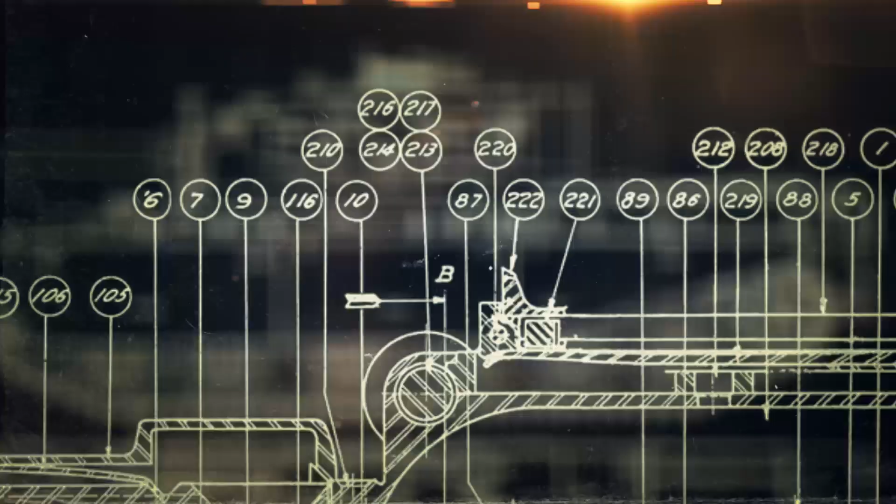This time on Battle Factory: the survival kit you carry in your pocket, the red dot that's right on target, battle dress that's bulletproof, and the submachine gun that strikes like a scorpion.

Battle Factory steps beyond the front lines into top secret factories where combat gear is built for battle.

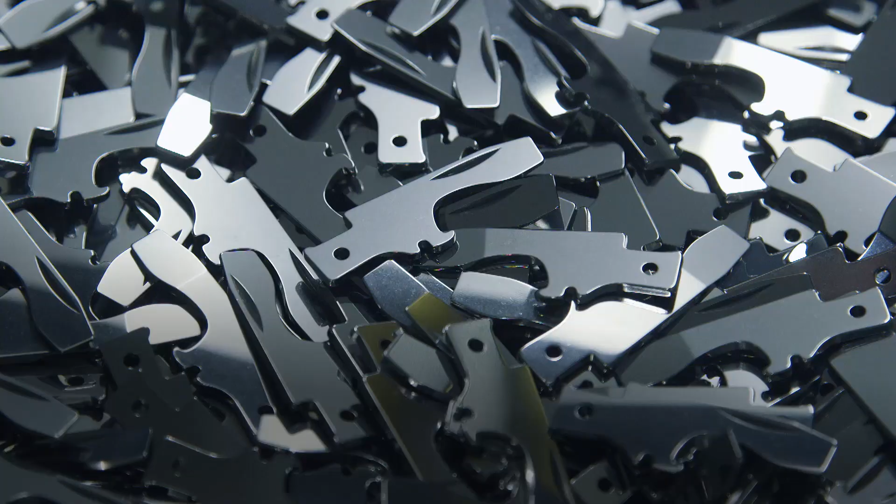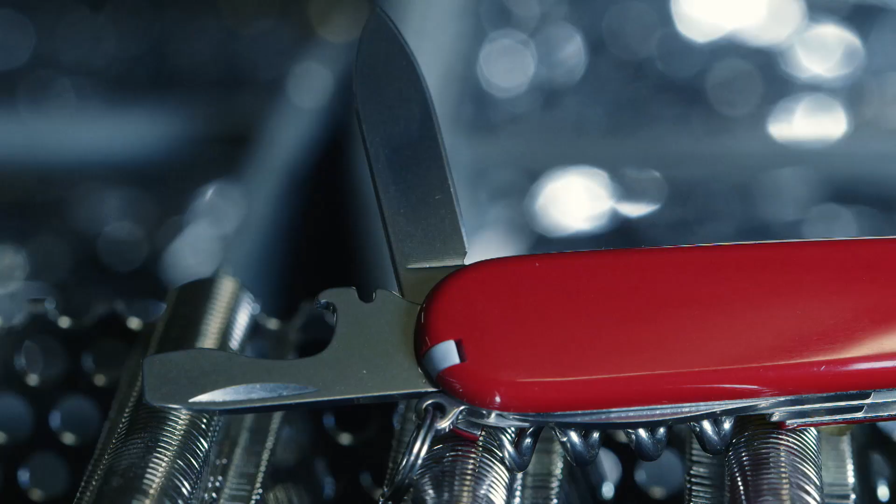When these tiny tools are machined and joined together, they will make up the ultimate mini multitasker. Since its invention over a century ago, the iconic Swiss Army knife has evolved into a pocket-sized hardware store with fold-out features that include everything from tweezers to a wood saw.

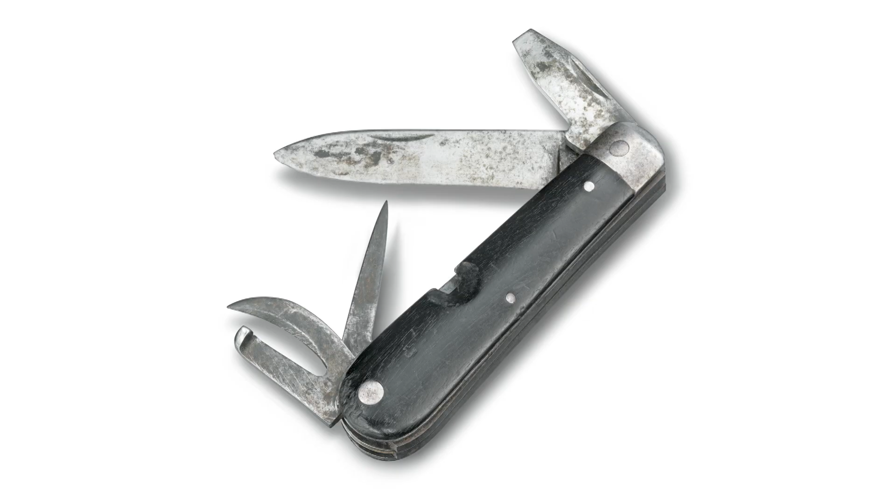In 1891, in his cutlery shop in Ibach, Switzerland, inventor Karl Elsener came up with a multi-tool which incorporated a knife, can opener, and screwdriver in one compact body, the soldier's knife, and it soon became standard issue to the Swiss Army. Today, the Swiss Army knife is used by millions of soldiers and civilians alike for everything from chopping firewood to building a spear.

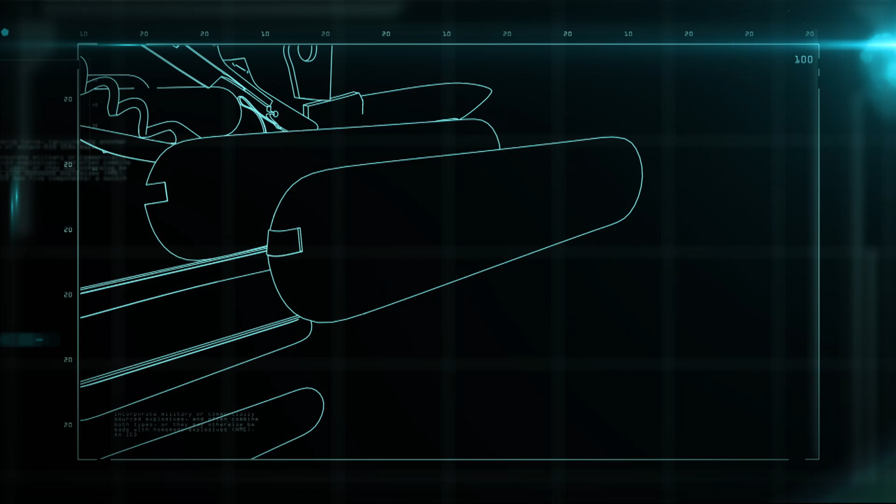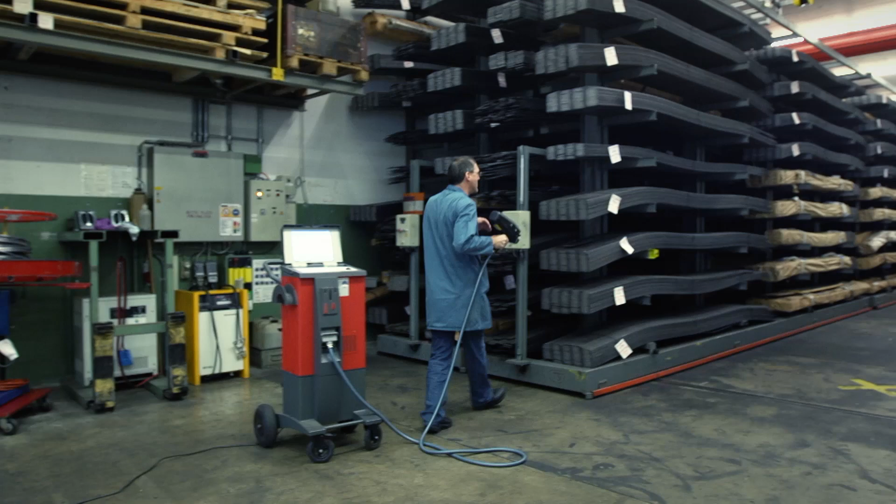The Swiss Army knife breaks down into three parts: the case, the dividers, and the tools. All the steel tools are made with 13% chrome to make them rust resistant.

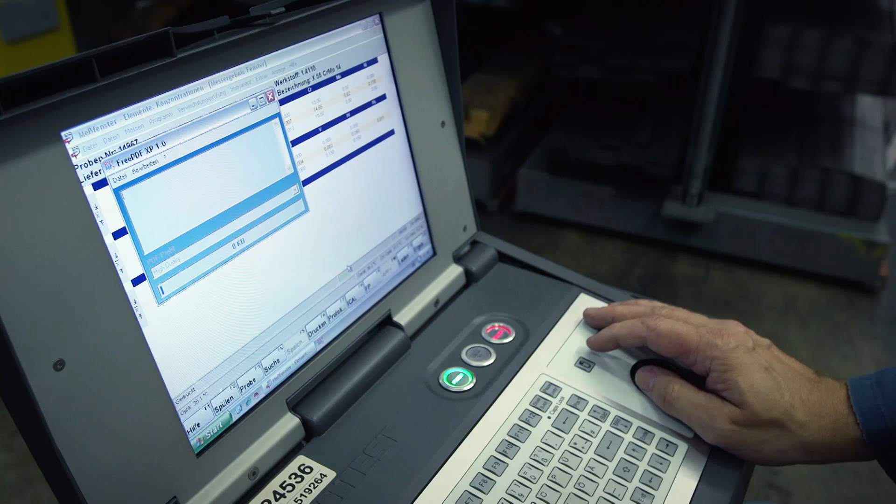Before construction begins, the steel sheets are checked for consistency. A spectral analyzer measures the purity of the metal. Spools of 3mm thick steel are transferred to the punch press room.

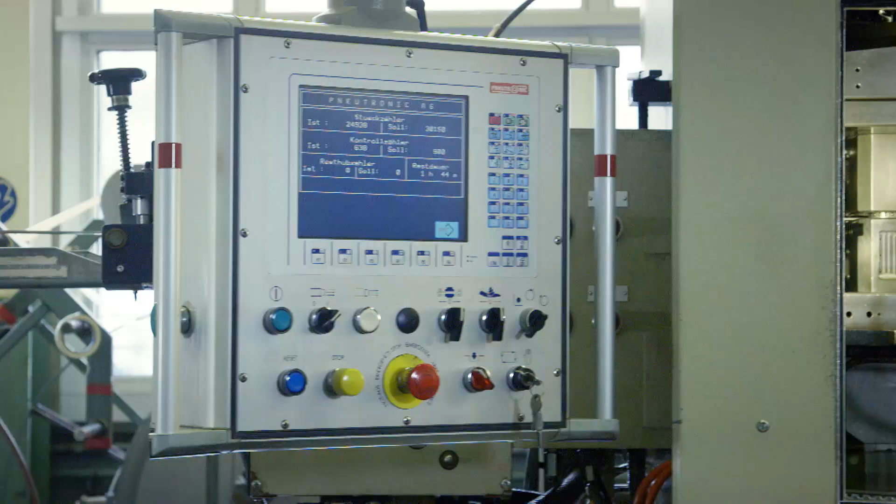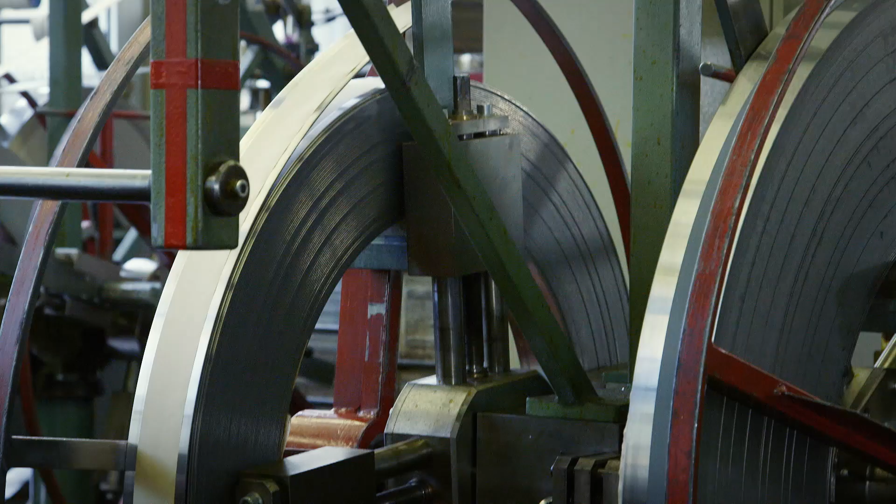20 computer-controlled presses punch through the steel with 40 tons of force to cut out the Swiss Army knife's legendary blade. Each strip of steel will produce 30,000 knives.

Next, the bottle openers, can openers, and the rest of the Swiss Army knife's many gadgets are punched out. The classic model contains 7 tools, including the penknife and scissors. But some knives, like the Swiss Champ XXLT, have 70 gadgets, including pliers, a magnifying glass, and a ballpoint pen.

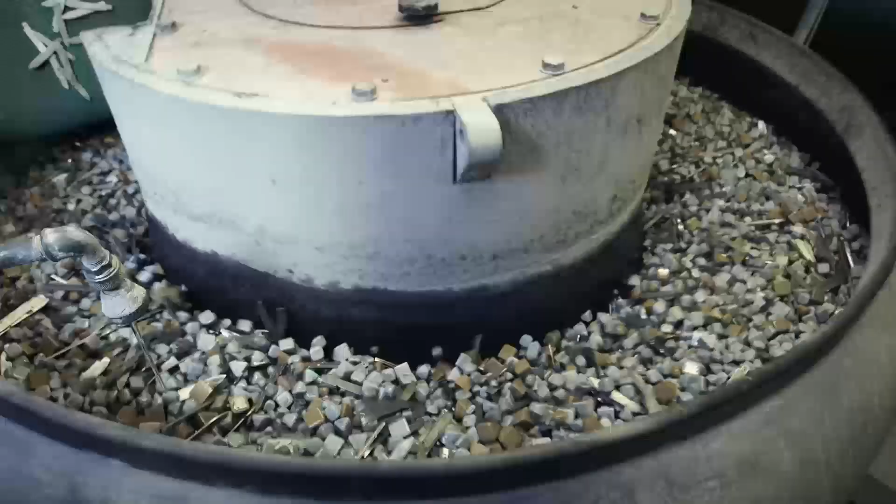The blades are placed in huge vibrating machines filled with stones and rubber chunks, which grind against the blades to deburr or smooth the edges.

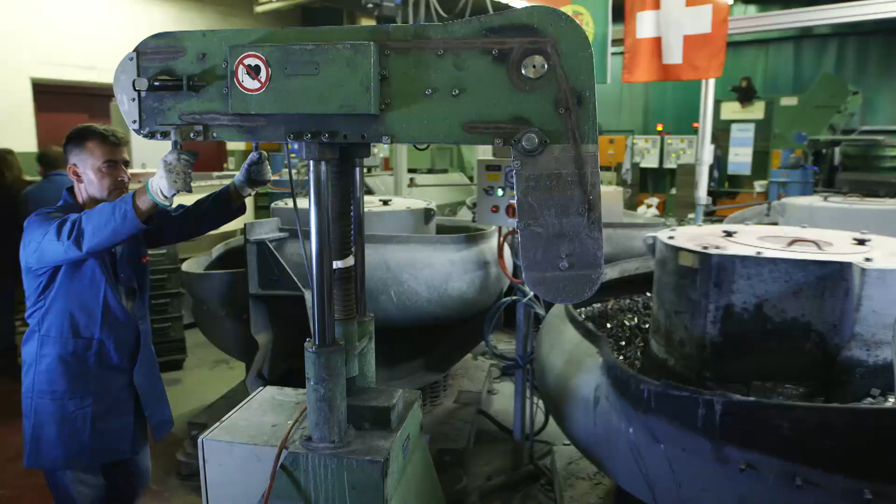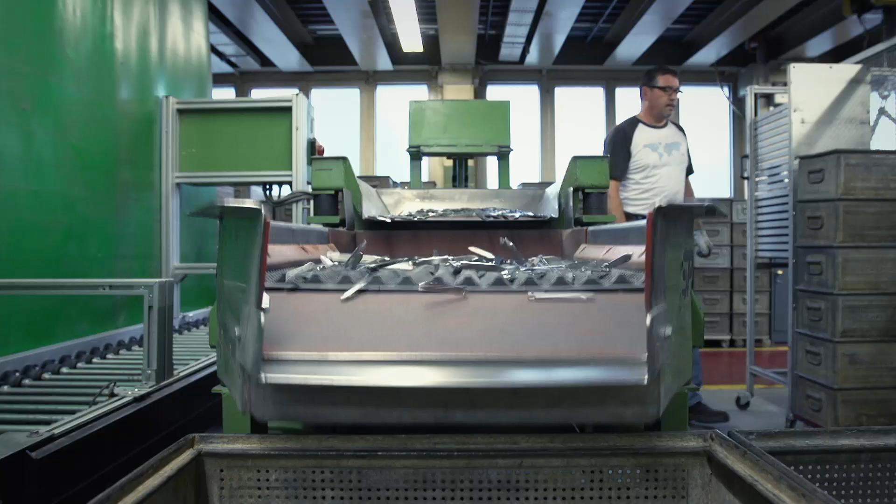Then the blades stick to a magnetic wheel, which picks them up and drops them onto a conveyor belt. They're deposited into a rotating tank full of sand, where they're dried and degreased. The excess parts are shaken loose in a jitter machine.

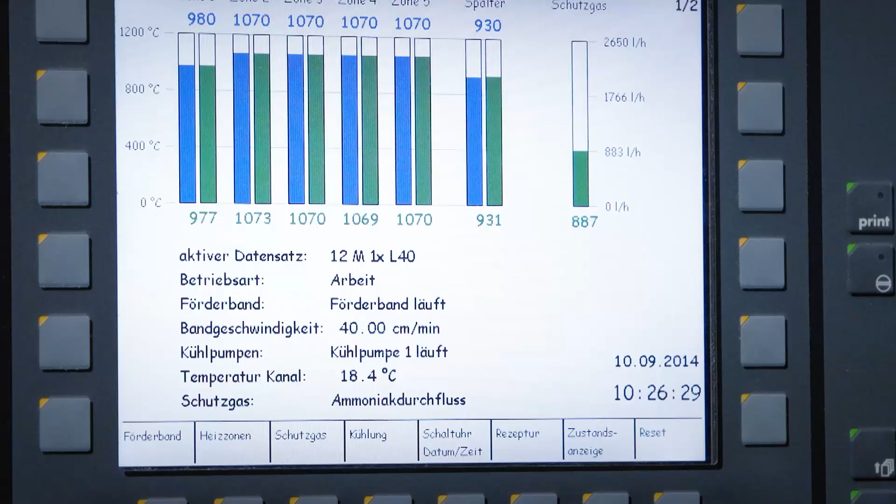The knives and other pieces are heated and then rapidly cooled. This alters their molecular structure and hardens the metal.

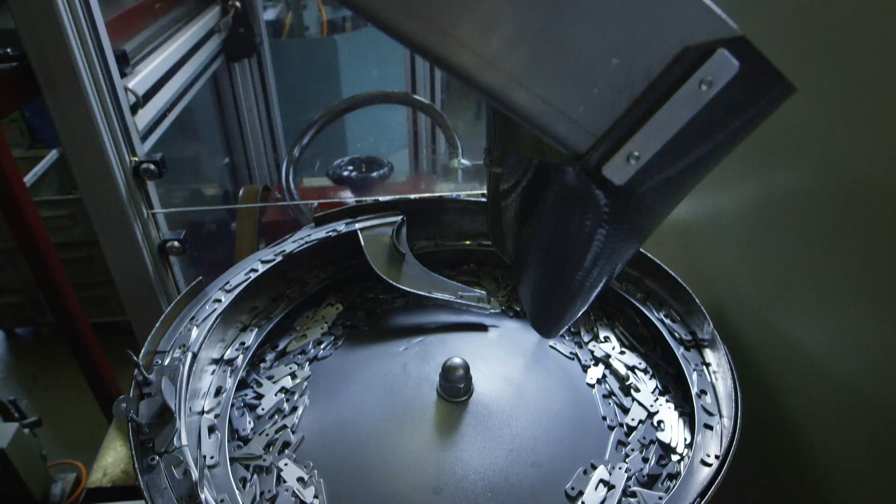Next, the parts are transferred to the automatic shape machine. The grooves, angles, and nail nicks are machined into the metal blade and can opener, which enables the user to grasp the tool between their fingers and pull it out of the case.

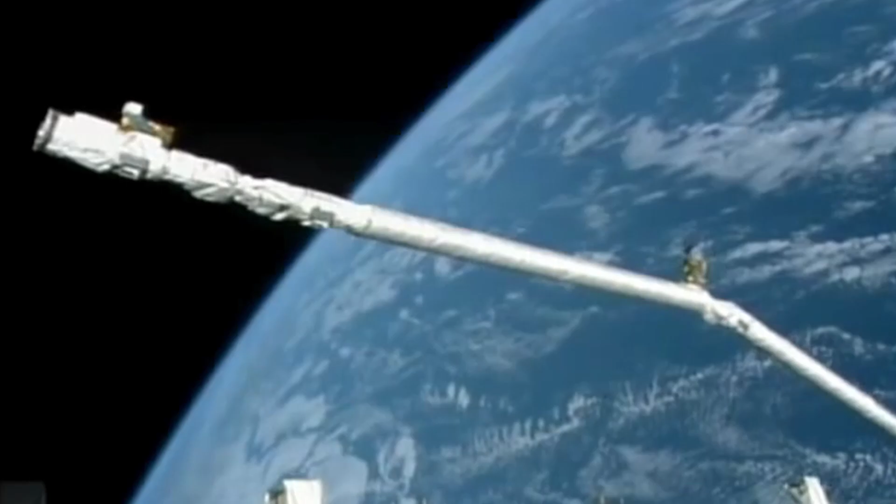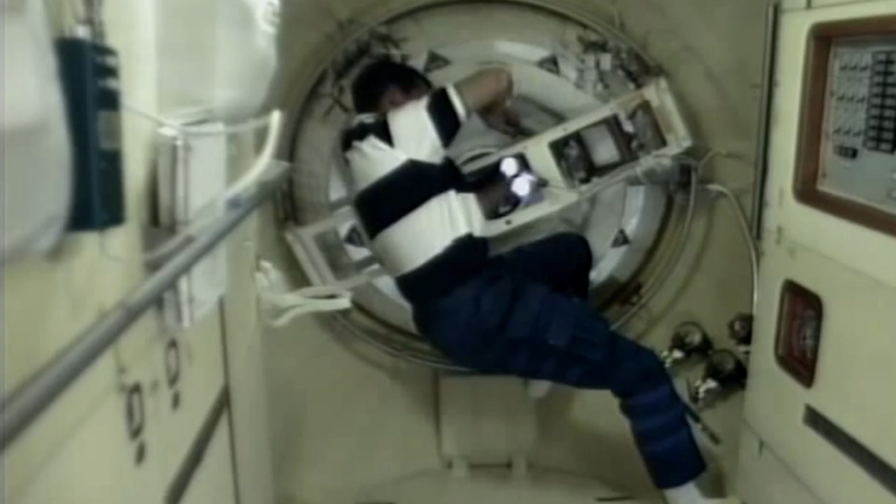In 1995, during his first mission into space, Canadian astronaut Chris Hadfield used his standard-issue Swiss Army knife to dock the space shuttle Atlantis to the Russian space station Mir. The cosmonauts had secured the hatch with a tough triple-knotted strapping material, and Hadfield simply couldn't untie it to open the door. Unclasping the blade on his Swiss Army knife, he was able to cut the strapping, get the door open, and make history.

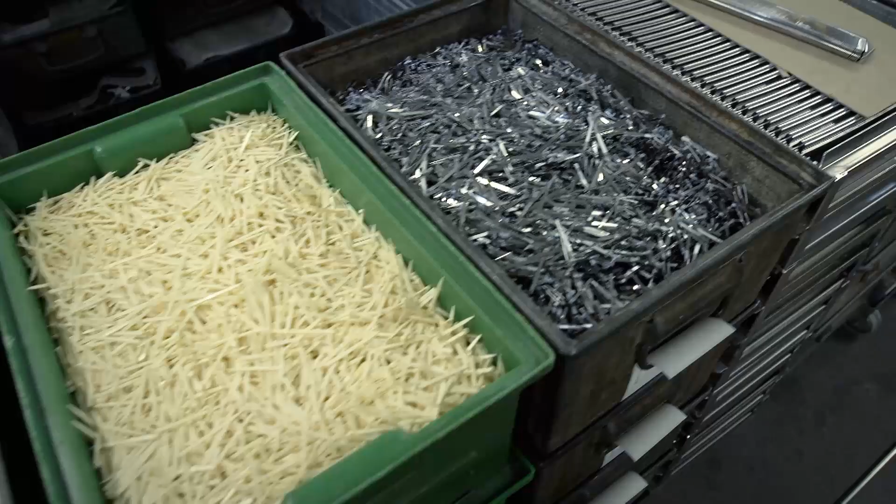All the parts are collected and itemized in a sorting room before they're shipped off for assembly. Pins are pressed into the case walls, which hold the entire mechanism together.

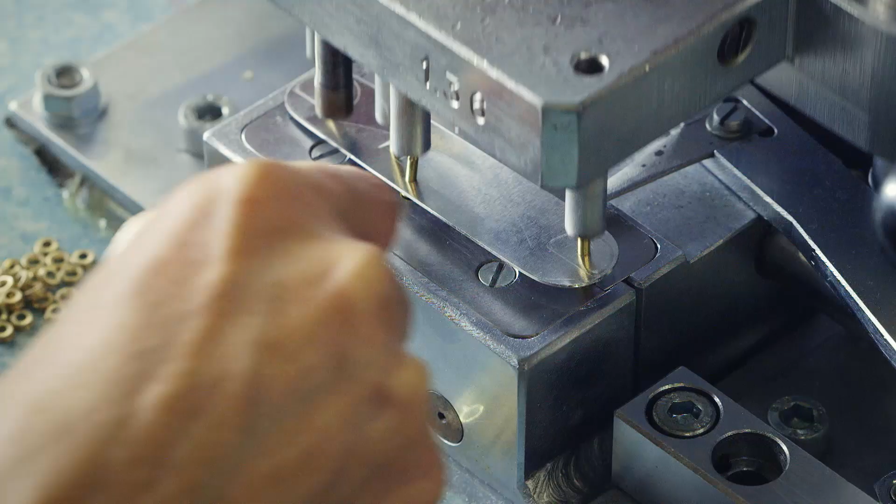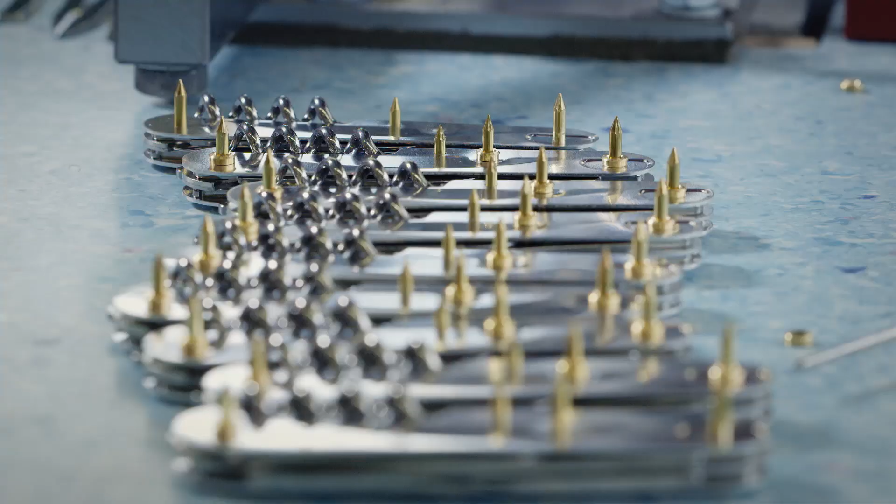Each item is placed in layers by hand, then a machine stamps them into place. A bushing is placed in between layers so that each tool unclasps smoothly without getting stuck on its neighbor.

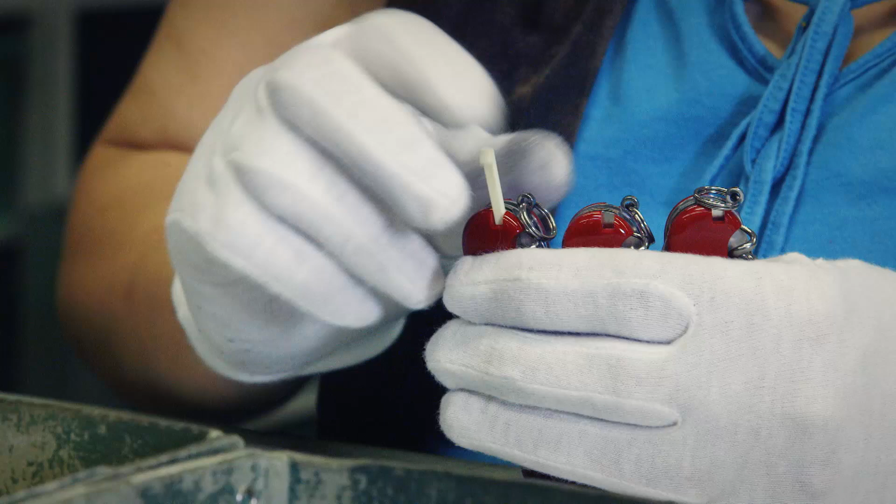Then the cover is press-fit on, and the little plastic toothpick is slid into its sheath. Before they leave the plant, every function on the knife is checked by hand. The Swiss Army knife is complete.

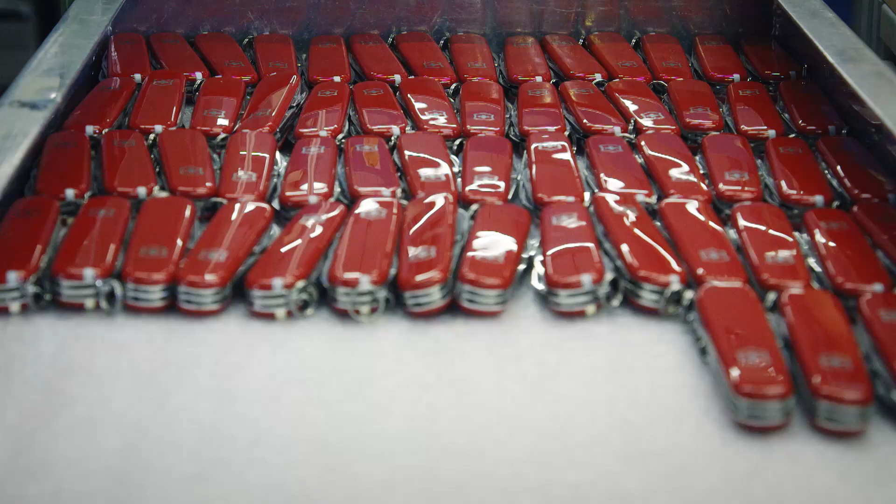Whatever the add-on, the Swiss Army knife has already earned its reputation as a legendary toolkit and a survival kit you can hold in the palm of your hand.

Coming up on Battle Factory: taking aim with laser-sharp accuracy, and what to wear to the front lines.

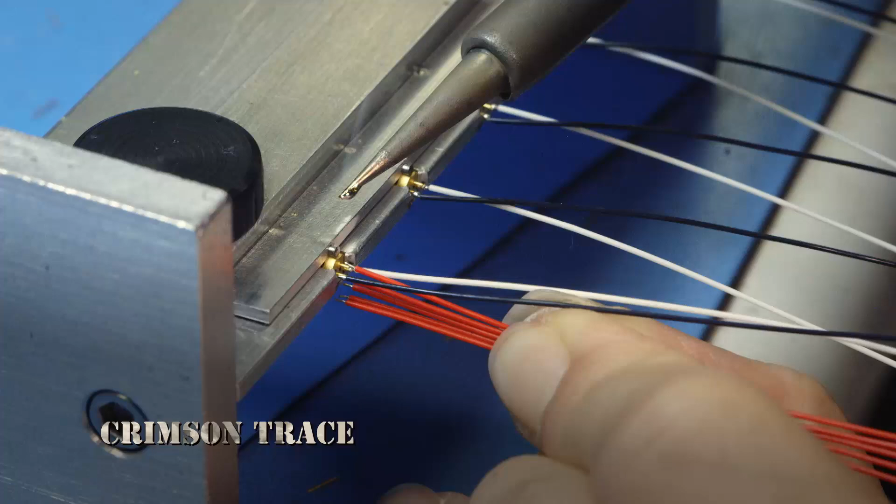When power runs through this diode and lens, it will project a laser beam that pinpoints a target with total accuracy and plants a red dot right on the bullseye.

The Crimson Trace MVF-515 red dot laser sight fits on the rail of a gun, and with its built-in flashlight provides precision targeting in any environment.

Red dot laser sights were invented in 1975, but they weren't adopted by the US military until the year 2000. Today, the laser sight is an integral part of the soldier's kit, sharpening aim and enhancing targeting, especially for nighttime operations.

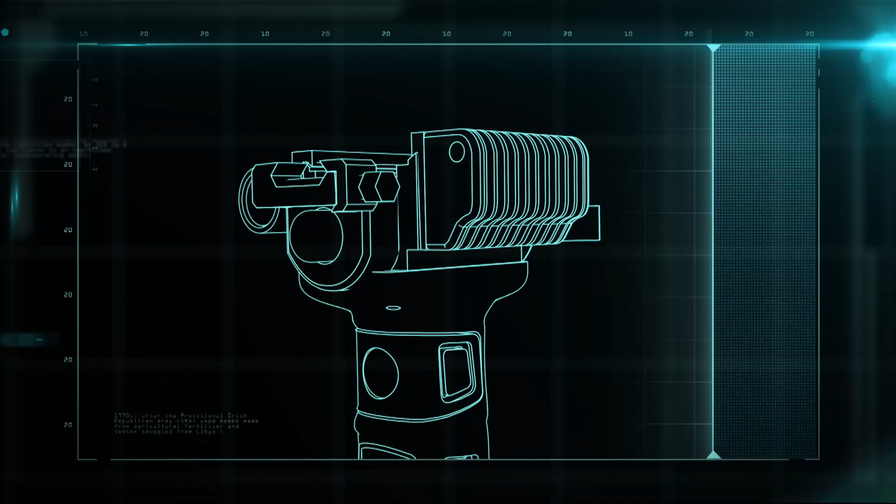The laser sight breaks down into three main parts: the flashlight, the tang, and the laser. The laser consists of a diode, which is an electro-optic, like the little filament inside of a light bulb, and a precision lens.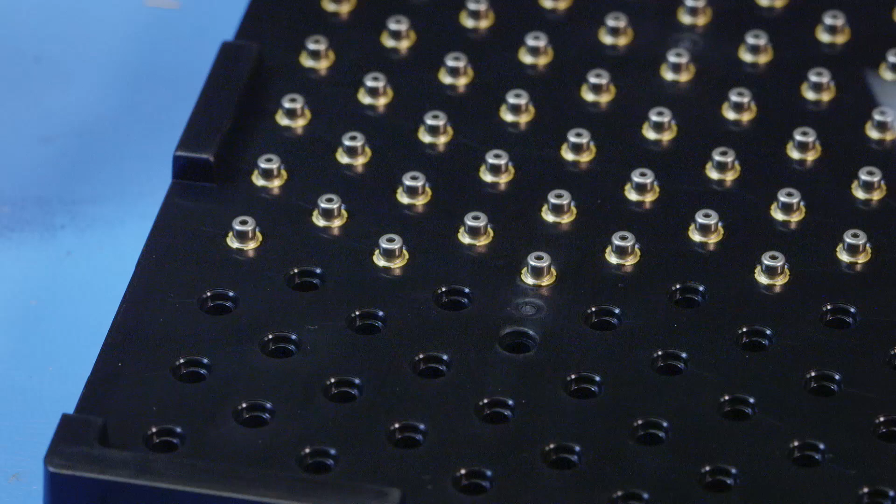In order to make the laser work, two tail wires need to be attached to the end of the diode, and the lens placed on top to focus the beam.

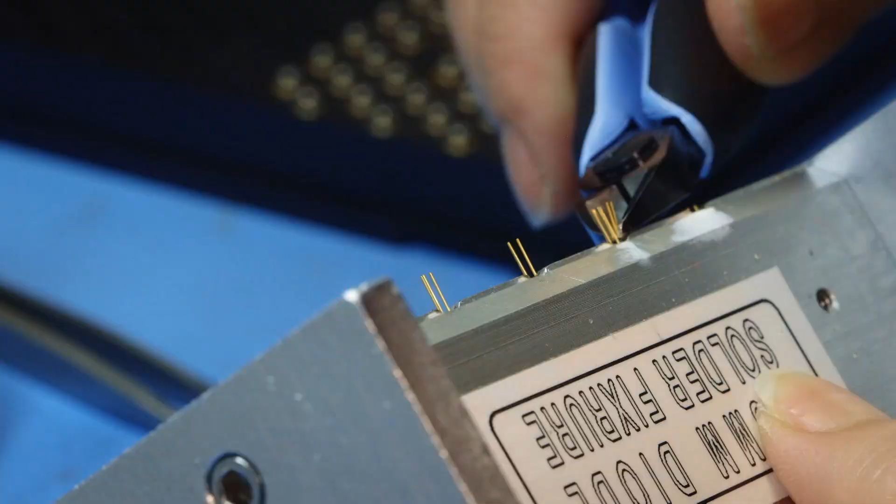First, the diodes are steadied on a fixture, and then the brass tips are snipped off. Next, the wires are dipped in an acid solution, then soldered to the diode tip.

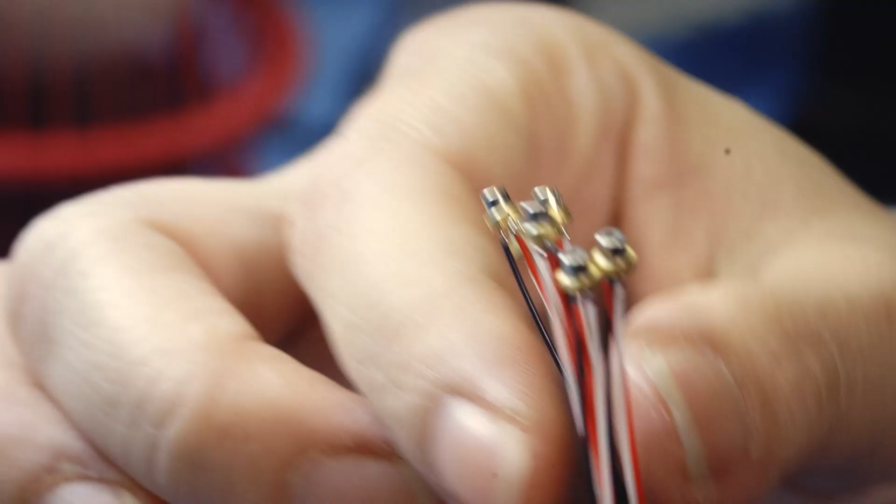Now wired for power, another technician presses the diode's tail post firmly in place with a coating of epoxy. The bond has to be tight for the laser to project a perfectly straight beam. Then it's left to dry for 24 hours.

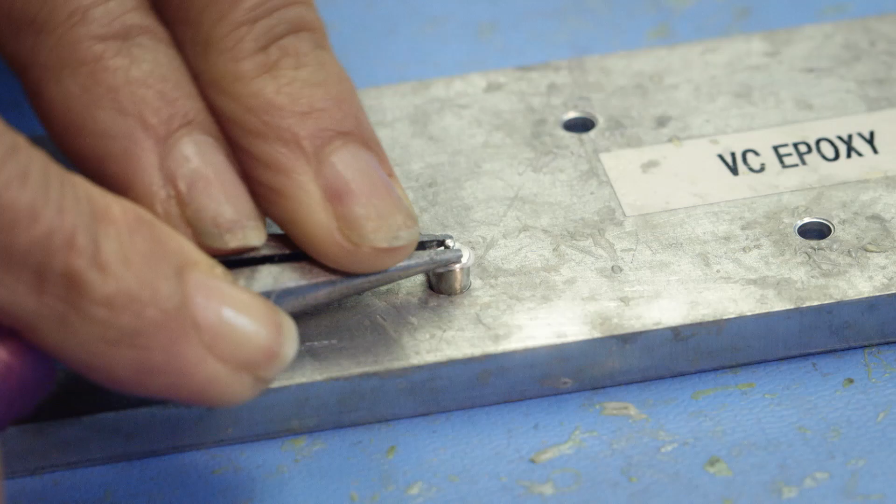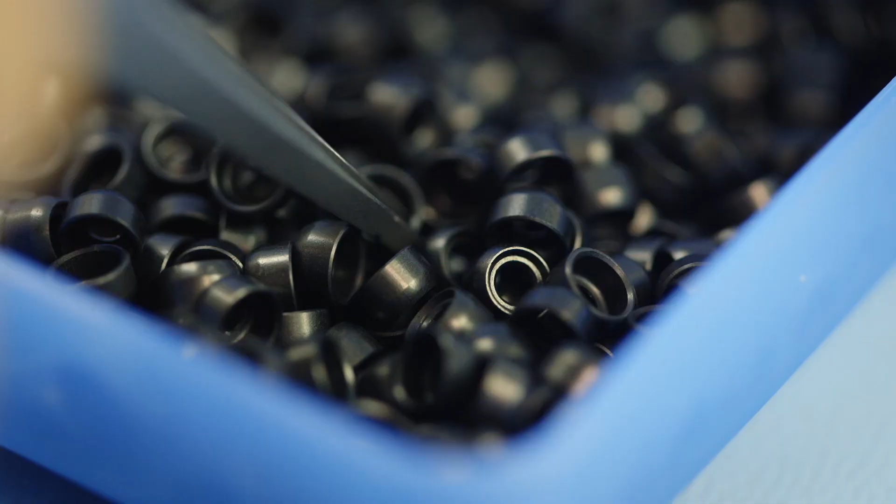The lens is dropped into the lens holder. The cap goes over the holder, and the lens system is press-fit together. The lens system amplifies and focuses the laser beam, which can project onto an object up to 230 meters away.

Pulling off a covert operation takes exhaustive training and razor-sharp aim. An elite team might take days closing in on their objective, then suddenly storm past a heavily guarded perimeter. With the laser sight pinpointing their target, that red dot will be the last thing their targets ever see.

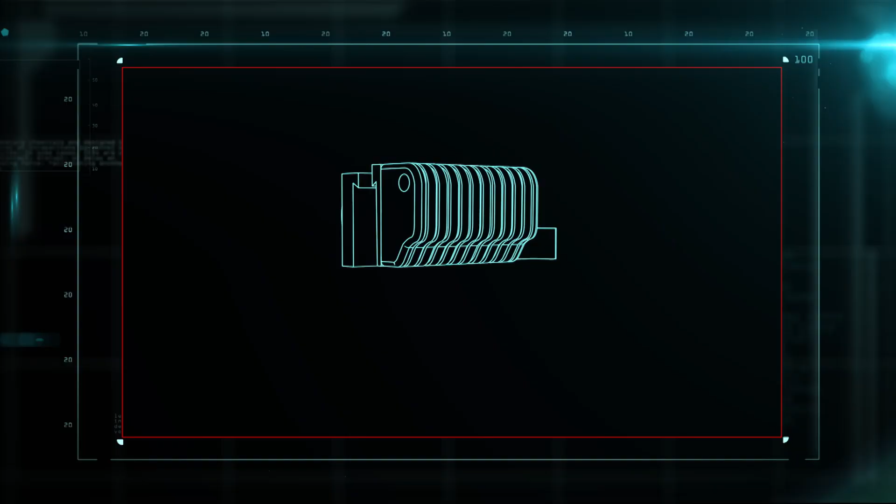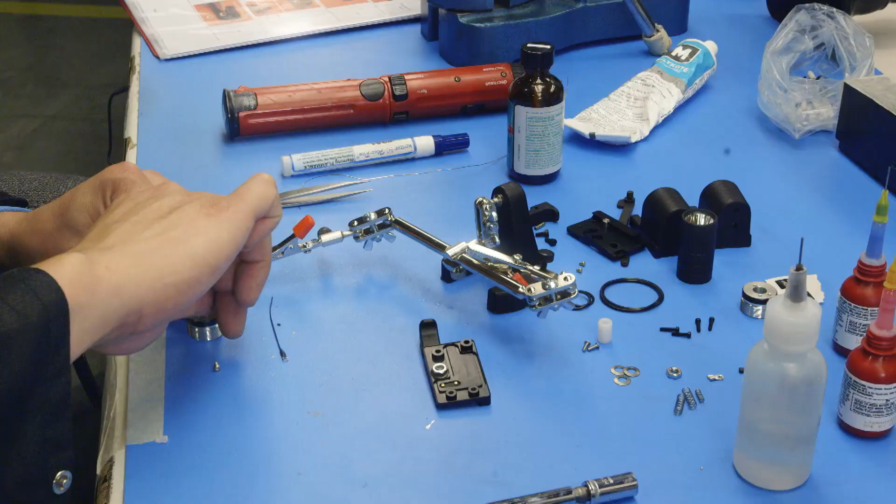The laser and flashlight sit on opposite sides of the sight's handle. First, the flashlight's electrical system is assembled, then capped inside the casing. Then the laser's diode and lens are fit together. Once connected, a tech calibrates the laser beam for sharpness and accuracy. The laser is then locked into its casing to complete construction.

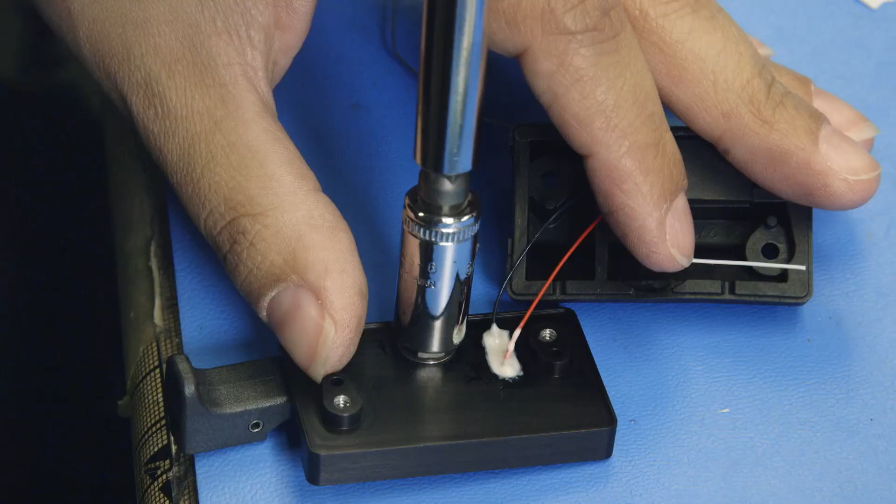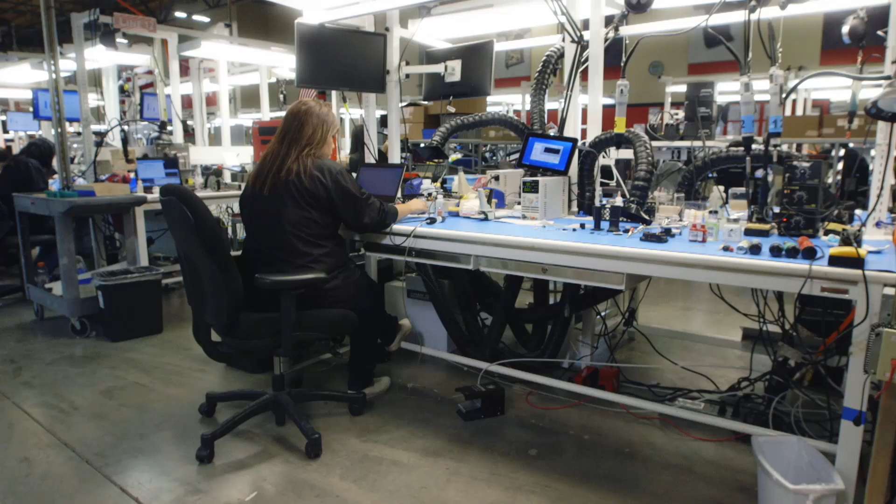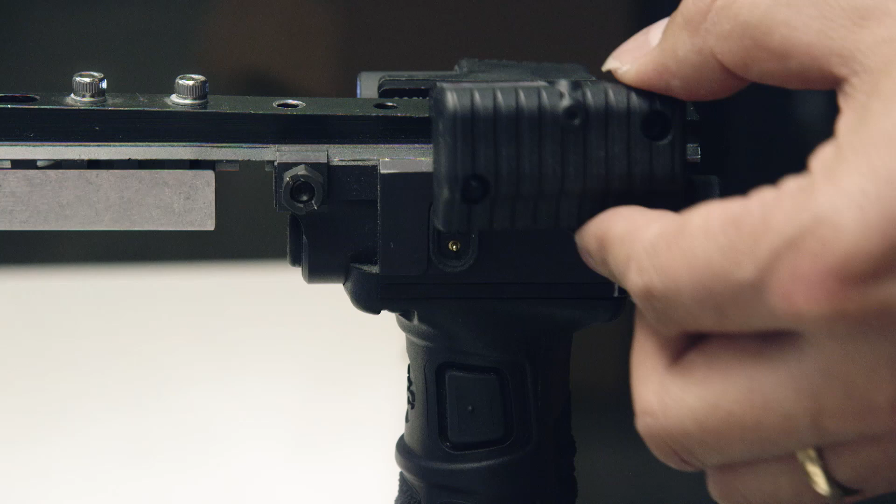The tang contains the laser sight's power supply, housed inside the grip. Once the circuit board is programmed, it's installed alongside the batteries it controls into the handle. The tang attaches under the barrel of the weapon, doubling as a grip onto which the flashlight and laser are mounted. The on-off switch is right on the grip, so the shooter never has to take his hand off his weapon to activate the sight.

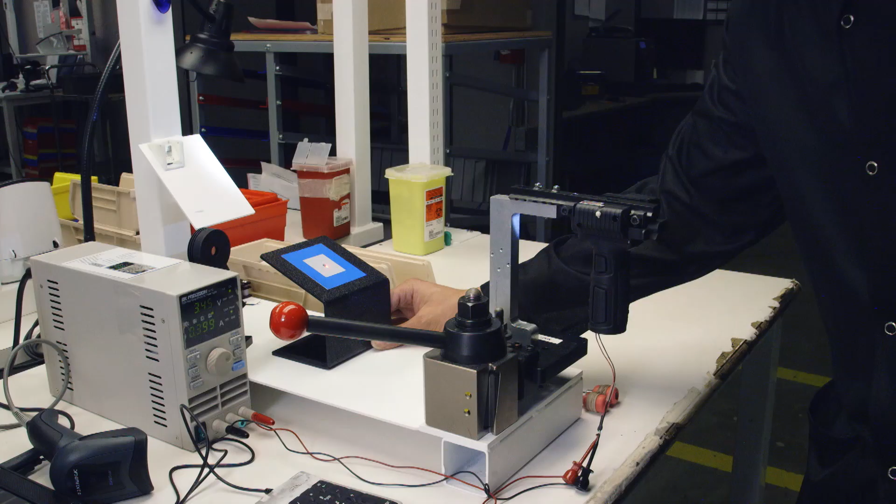The laser sight is calibrated to ensure total precision. The MVF600 is ready for action.

On the firing range, the laser sight is tested for accuracy. The beam aims for a target 30 meters away, focusing the red dot at its center. Bullseye. In the real world and combat zone, the MVF600 will do what it's designed to do with lethal precision: guide a bullet so it lands right on the red dot.

Coming up on Battle Factory: a suit of armor for the modern-day warrior, and looking down the barrel of a submachine gun.

These bolts of bulletproof fabric will soon become wearable protection and a soldier's last line of defense. In the past, body armor tended to be clunky, cumbersome, and restrictive. Today, it's built for maximum protection and maximum mobility.

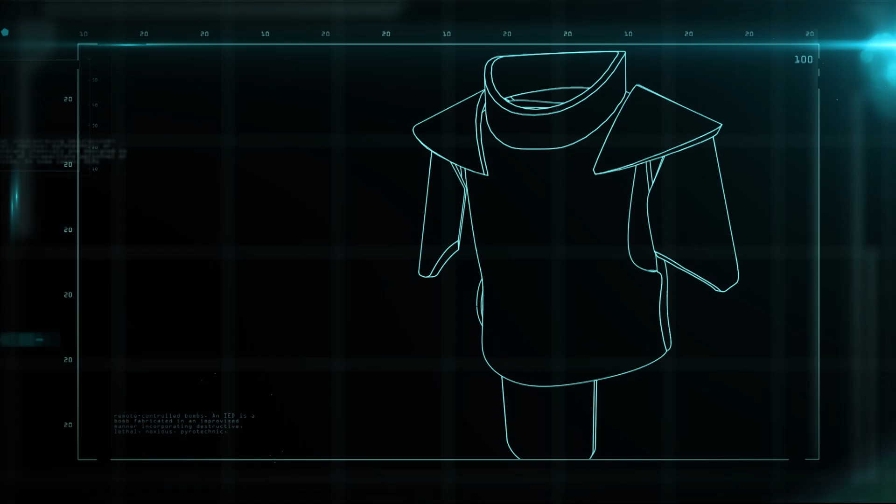Fenix combat body armor owes much of its strength to a lightweight synthetic ballistic material called aramid. Comprised of 82 different pieces, the Fenix body armor is made up of the armored plating and the fabric.

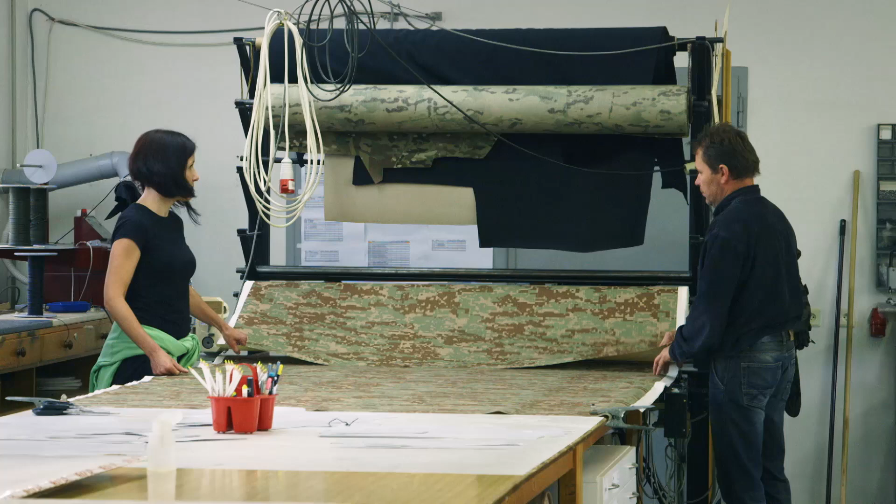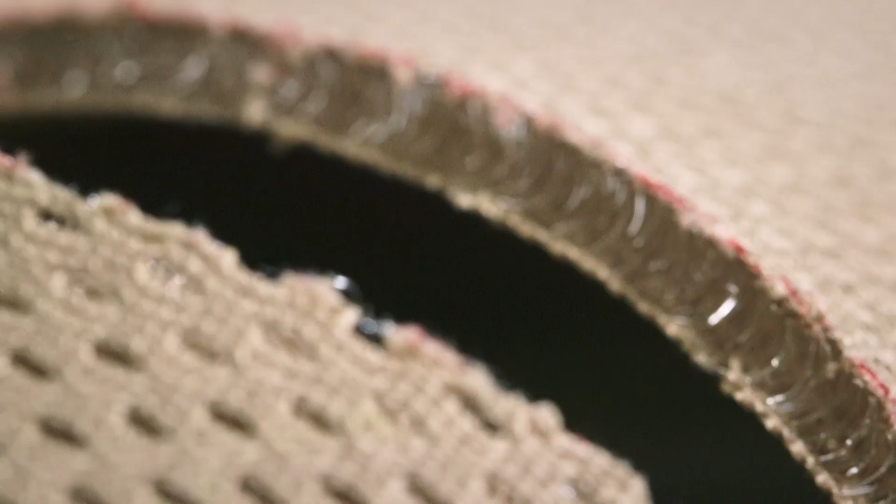Rolls of camouflage fabric are laid out onto a table. Templates of the 60 shapes that make up the vest are laid over the material, traced and cut. A layer of 3D shock protection netting lines the inside of the vest, absorbing the impact of an explosive shock wave or bullet to minimize injury.

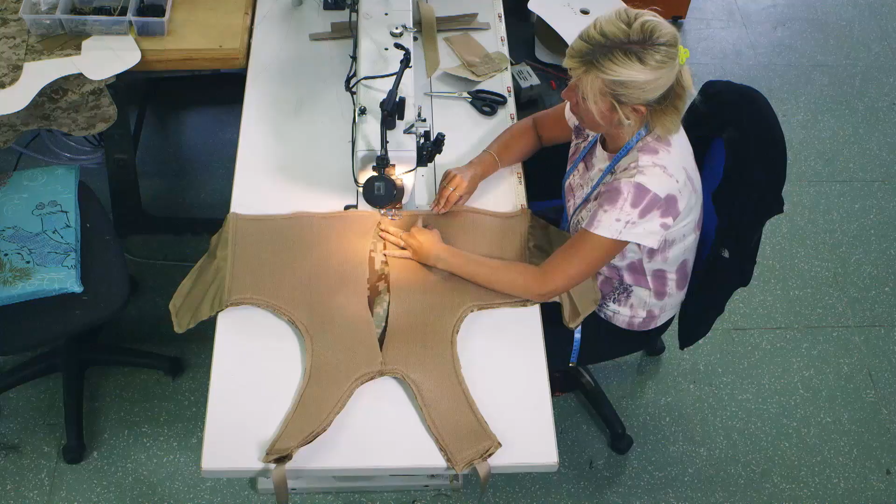Camouflage fabric pouches are sewn into the netting that will hold padding and armor. The basic profile is then sewn together to form the front and back of the vest. Heavy nylon strips are sewn into the vest to hold the surface components of the armor in place.

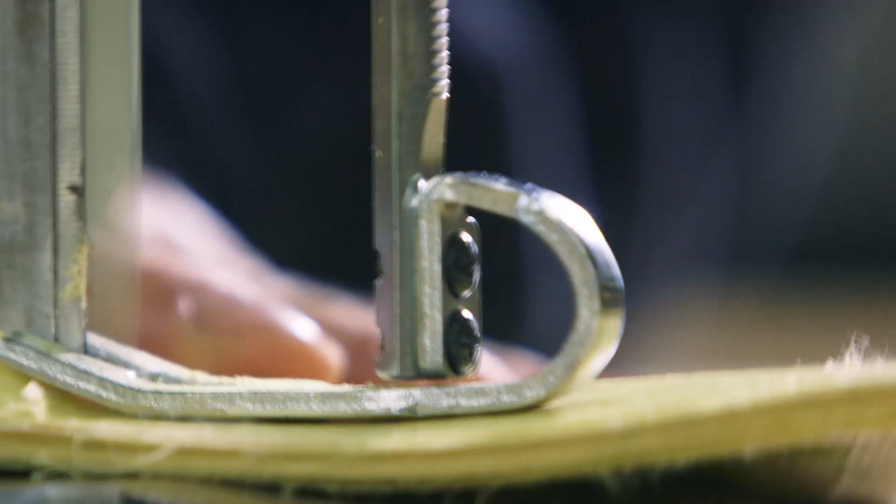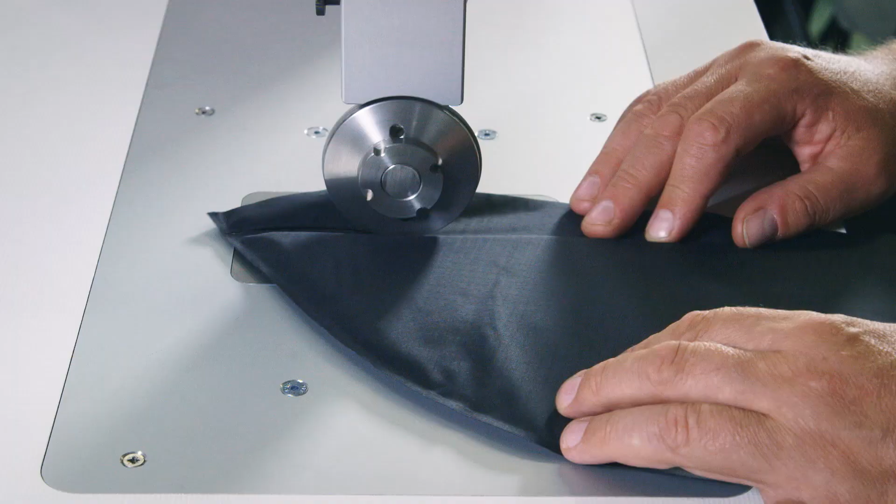Layers of aramid form the soft ballistic protection packets. They're placed in waterproof bags and sealed with an ultrasonic welder before they're inserted into the vest. This process is vital, as any water or moisture in the aramid will compromise its bulletproof nature and make it act more like a lubricant, actually helping the bullet to penetrate the wearer.

In a Taliban compound in Afghanistan in February 2008, Royal Marine Lance Corporal Matthew Croucher was patrolling with his crew when he hit a tripwire tied to a grenade. With only seconds to react, Croucher threw his backpack onto the grenade and dove onto it, hoping his sacrifice would save the rest of his team. While the explosion tore up his gear, his body armor absorbed enough of the impact to save every member of his unit, himself included. Croucher was awarded the George Cross for gallantry.

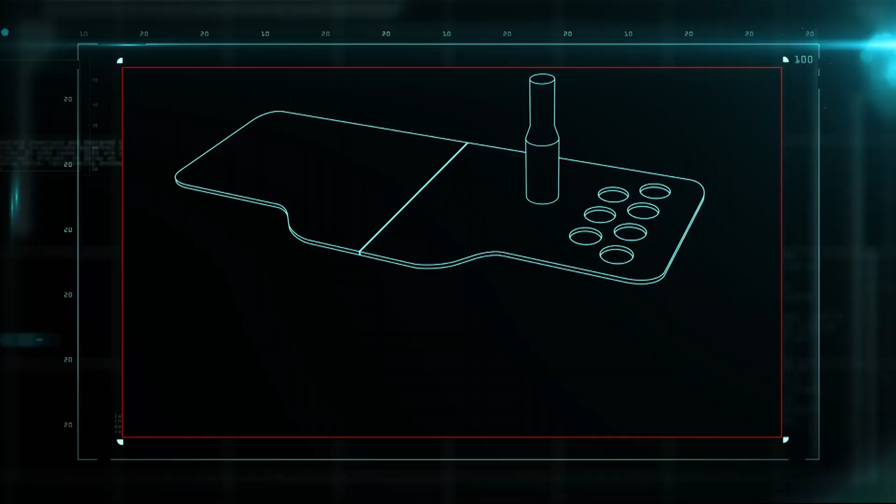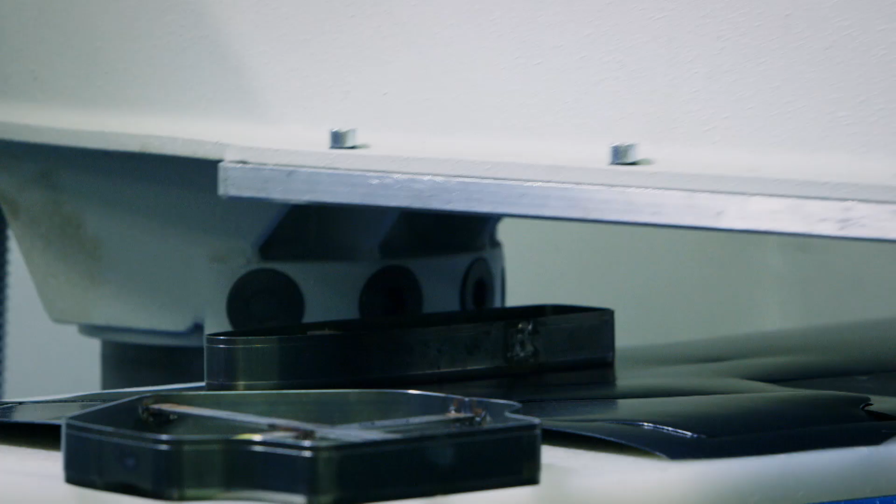The rigid armor is made from plates of strong, lightweight PVC. The smaller segments are die-punched by machine, but larger pieces, like the backplate, are traced, cut, then punched out by hand. Holes are punched out of the PVC plates to lighten the armor.

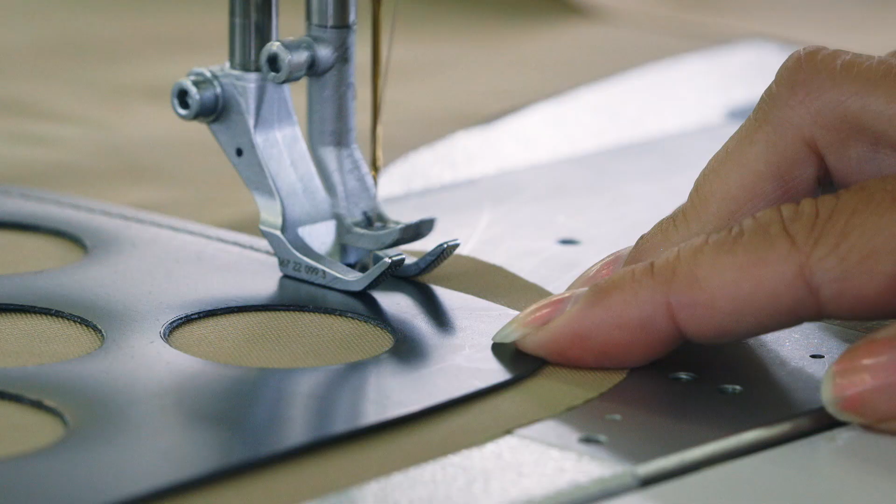The plates are then sewn into the pouches in the front, back, shoulders, and around the waist. When the vest is tightened, 35 kilos worth of armor plating is spread evenly around the body, taking the stress off the shoulders. Now, the body armor is ready to be assembled.

The packets of aramid are inserted into the camouflage fabric, and the 3D shock protection pouches are sealed with Velcro. An additional layer of heavy ballistic material is inserted into the body of the vest. The front and back pieces are attached to a quick release system so they can be ripped off to alleviate weight or treat an injury. Then the groin, shoulder, neck, and other padding is attached to the main body. The completed armor is ready for testing.

On the firing range, the body armor is draped over a thick block of putty to simulate a human body. First, it takes rounds from a semi-automatic 9mm. Then the armor is checked to see where the bullets might have penetrated. Marks in the putty would be wounds on the wearer. Then the process is repeated with the submachine gun.

Coming up on Battle Factory: a single round or full-on automatic, it's the right weapon for any operation.

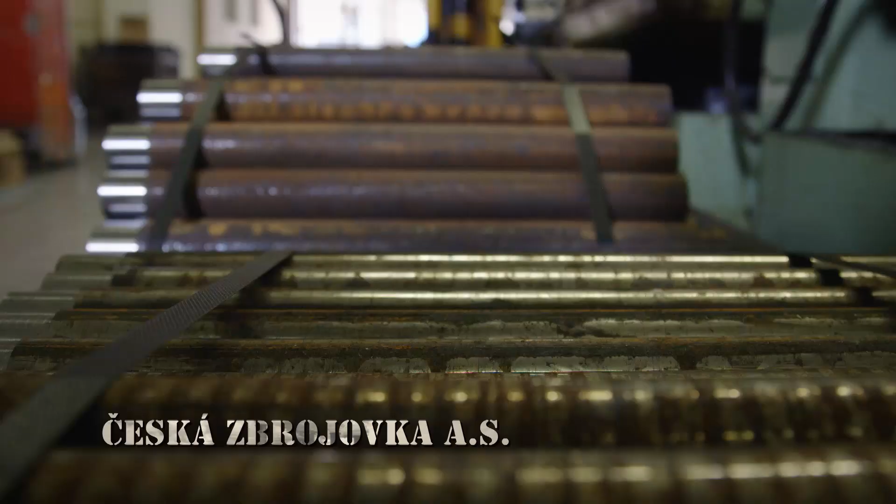When this steel bar is drilled and honed, it'll become the barrel end of a weapon that's compact, versatile, and deadly as a scorpion.

The Scorpion submachine gun is lighter than a rifle and more versatile than a handgun. Fast loading with a fold-out stock, it can fire single shots, 3-round bursts, or empty its magazine in full auto. Accurate to 200 meters, the Scorpion is the weapon of choice for many military and security forces around the world.

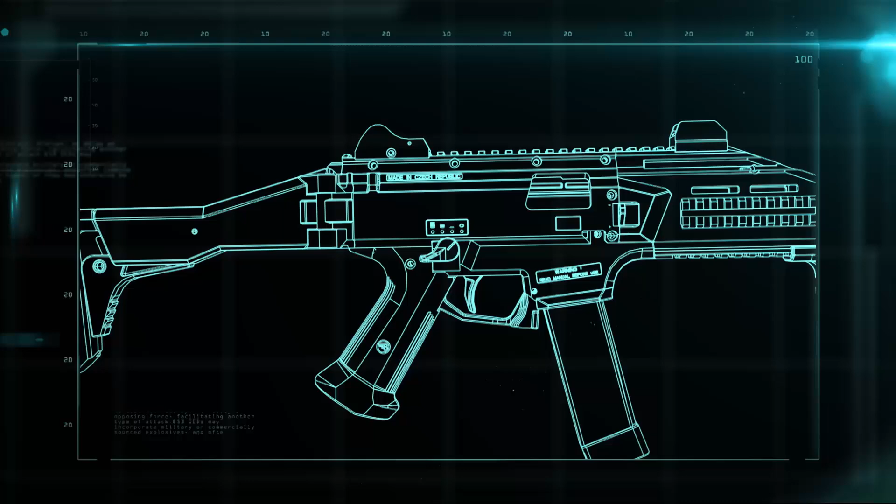And the Scorpion submachine gun's ability to shoot with precision is built right into the barrel.

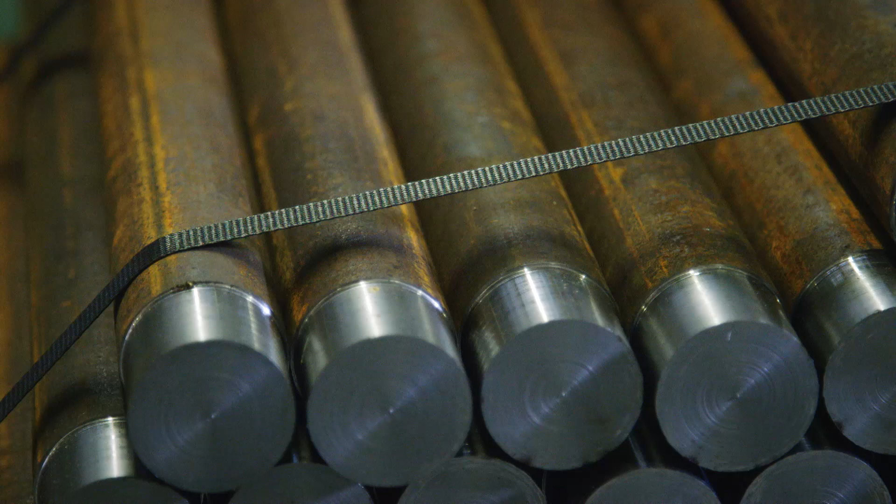The steel used to make the Scorpion's barrel is first left to cure outside the plant. Weathering the rain, heat, and changing temperatures might coat the metal with rust, but it also makes it more durable.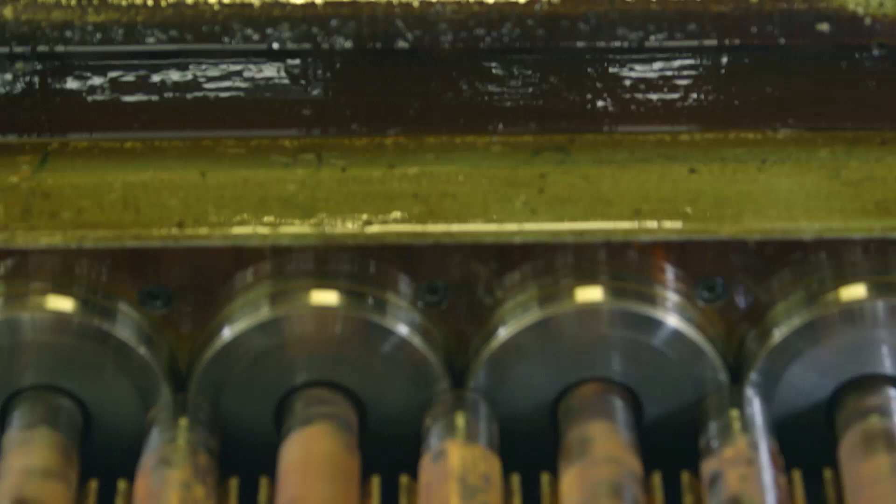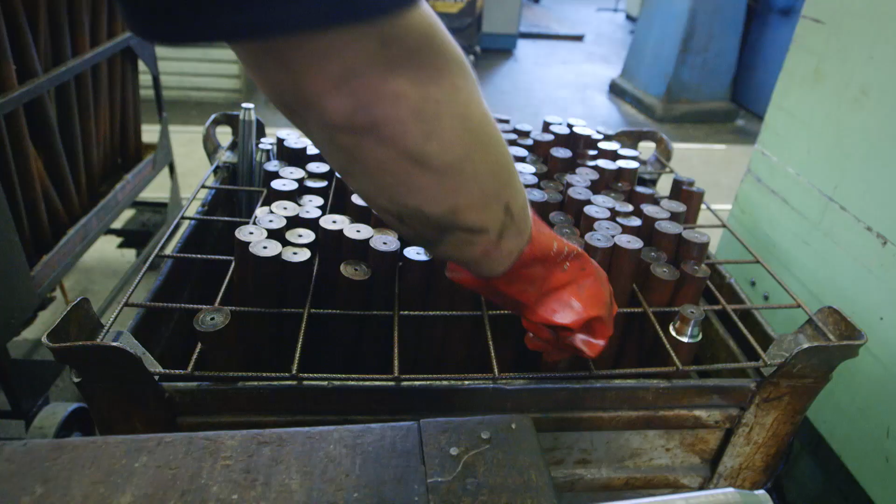First, the barrel is precision drilled to create a hollow running the length of the cylinder. Next, the opening is bored out in 115mm sections. The barrel spins on a lathe to scrape off the rust and smooth out the surface.

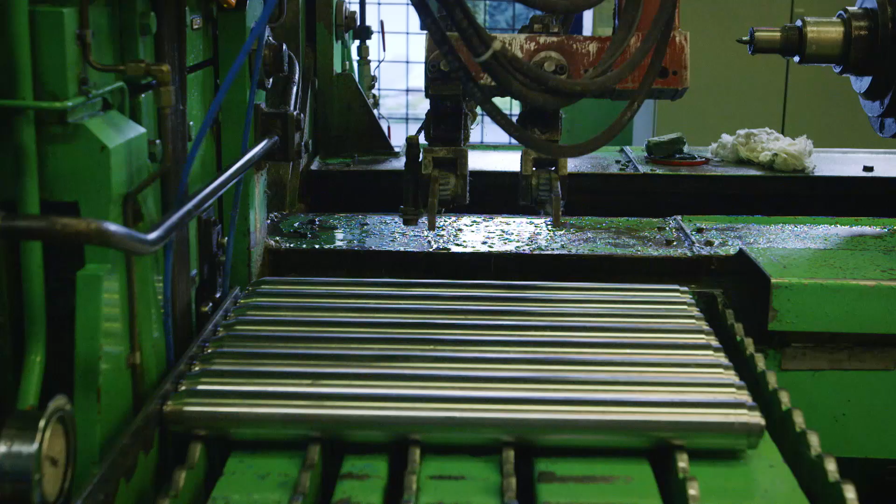In a hammer forge, 4 synchronized hammers pummel at the steel 1,000 times per minute with 45 tons of force, extending the length of the barrel and etching out corkscrew grooves on the inner wall. These unique grooves, or rifling, cause the bullets to spin so they fly straight and true.

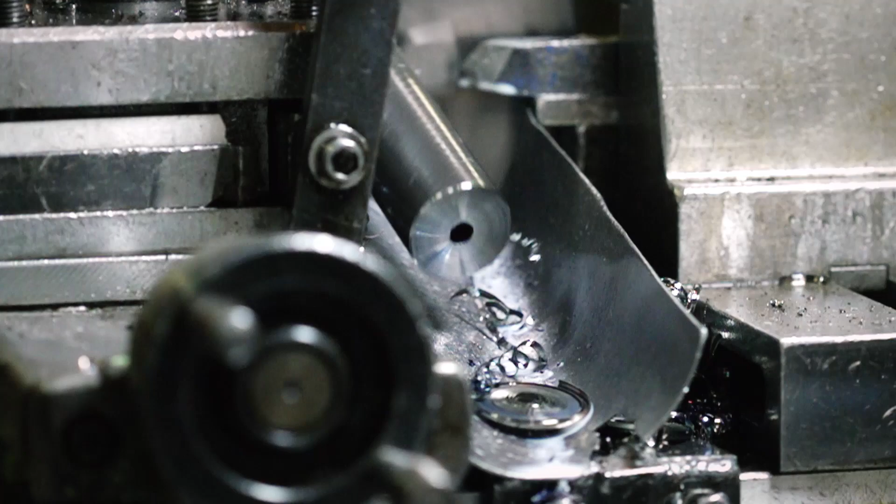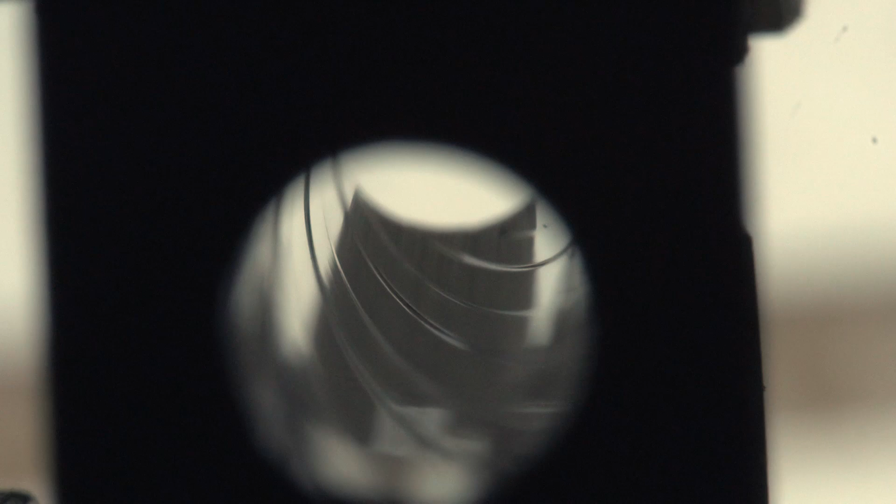Then, the barrel is cut to length. Finally, a technician inspects the barrel's interior, cleaning out any debris and checking the rifling that makes up this Scorpion's distinctive fingerprint. Any flaw in the barrel could send a bullet way off its mark.

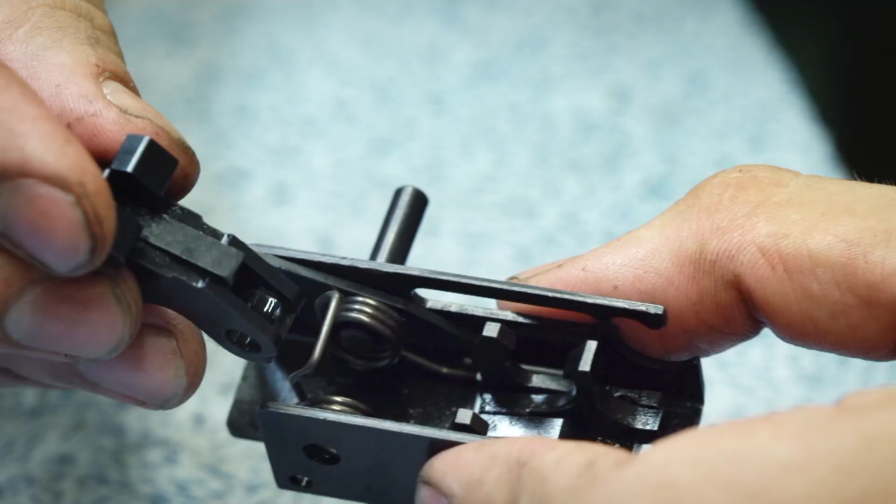The trigger is cut to spec inside a computer-controlled cutting machine. Small components that make up the submachine gun's action, including the slide stop, trigger, and dynamic bolt, are baked in a very hot kiln to harden and toughen the metal.

On April 30th, 1980, 6 armed men stormed the Iranian embassy in London, taking 26 hostages and demanding passage out of England and the release of their imprisoned brethren. For days, British police stalled, managing to gain the release of 5 hostages without giving in to terrorist demands. In frustration, the terrorists executed a hostage. With lightning force, the British Special Air Service, armed with submachine guns and stun grenades, stormed the embassy, killing 5 of the 6 terrorists and rescuing all but 1 of the hostages. The SAS solidified their reputation in the most successful rescue operation of all time.

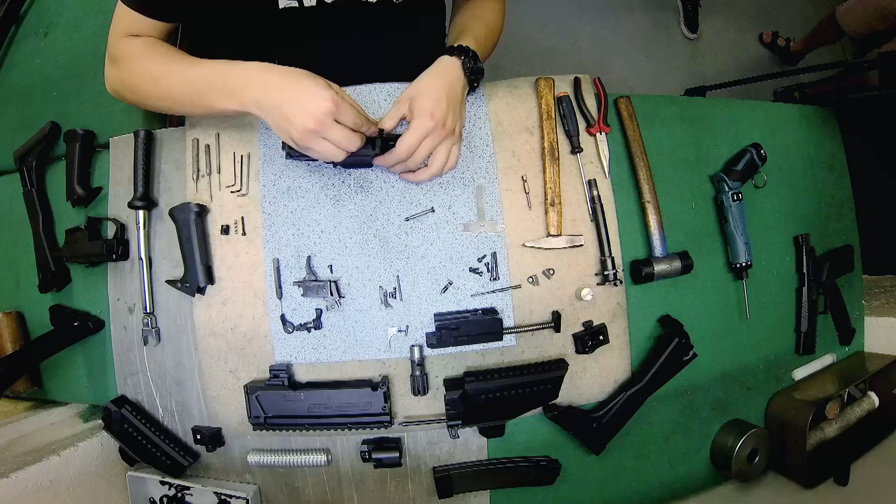All in all, it takes about 25 minutes to assemble the gun. Each part must fit precisely to within a millimeter's tolerance. The barrel is attached to the body of the gun. Next, the trigger assembly and slide are inserted into the stock.

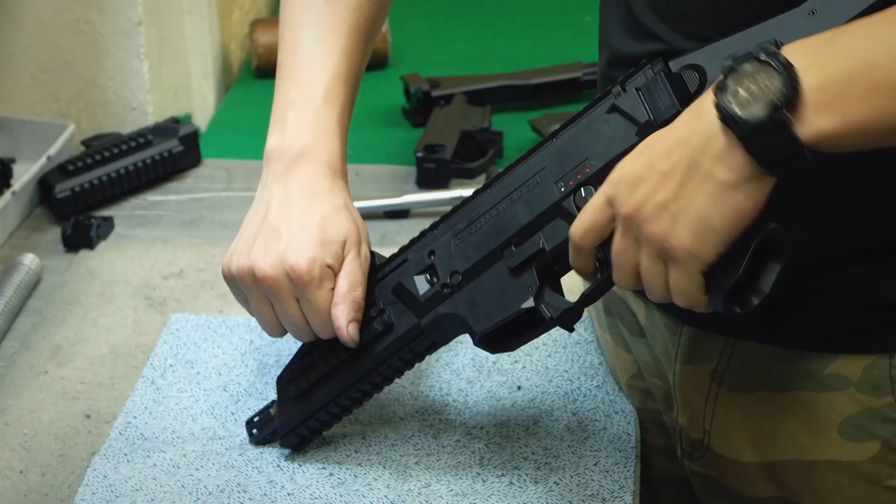The Scorpion submachine gun is known as the gun that'll shoot under any condition. To make sure it lives up to its reputation, testing goes to extremes.

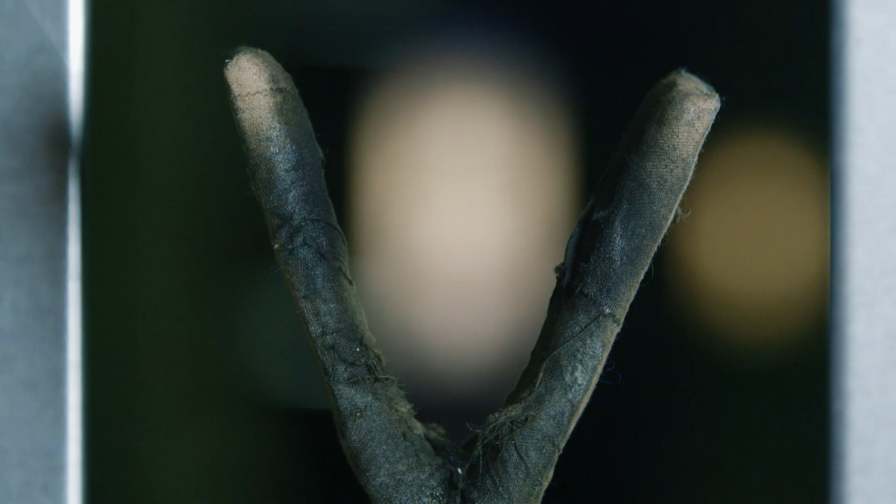First, the gun fires 2 overpressure rounds, 20 to 30% more powerful than a typical round, to ensure the strength of the gun. Then, the gun is subjected to a 5-round precision test, the results of which are measured by a computer.

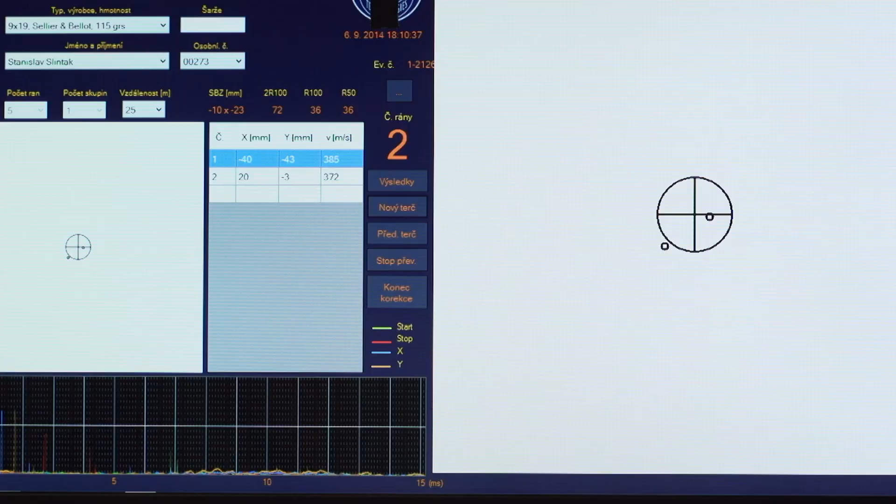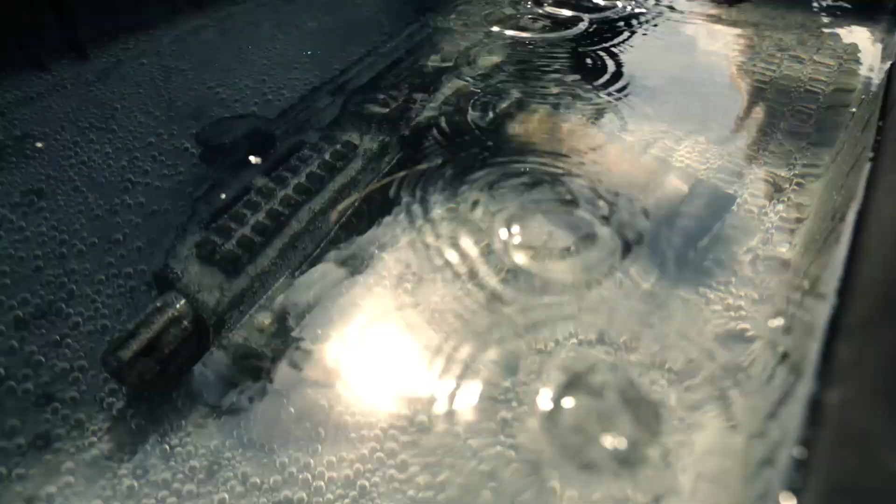The Scorpion is built to withstand being dropped from a height without shattering. It can also be submerged until water fills the gun. Once it's completely soaked, rounds can still be fired in full automatic mode.

Even when the gun is dumped into thick bogs of mud and coated, it continues to fire. The Scorpion submachine gun combines the best of a full-scale automatic rifle and a nimble handgun. And like its namesake, it's got survival skills and a killer instinct.